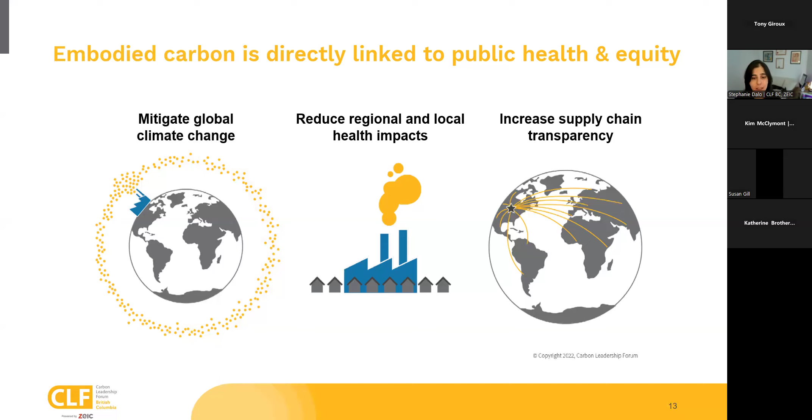Okay, so that's the why. Now I'm going to get into what embodied carbon is, and then we'll get into how we reduce that. There's a little bit on how we measure it, and then we'll get into some strategies.

The term embodied carbon refers to the carbon emissions associated with the entire life cycle of a product. It typically excludes emissions from energy use, known as operational carbon, but it's most frequently applied to construction, where the product is new or renovated buildings. In Vancouver, the embodied carbon of construction is closely associated with what is referred to as Scope 3 emissions, or consumption-based emissions of the construction sector.

My next slide will break down a little bit better the difference between just a life cycle assessment and a whole building life cycle assessment. A whole building LCA is a term that refers to the life cycle assessment of an entire building.

That includes various stages, which captures the product stage, raw material supply, transport to a factory, and manufacturing of the product. Then the transportation of that material to the job site, and the construction emissions related to using those materials.

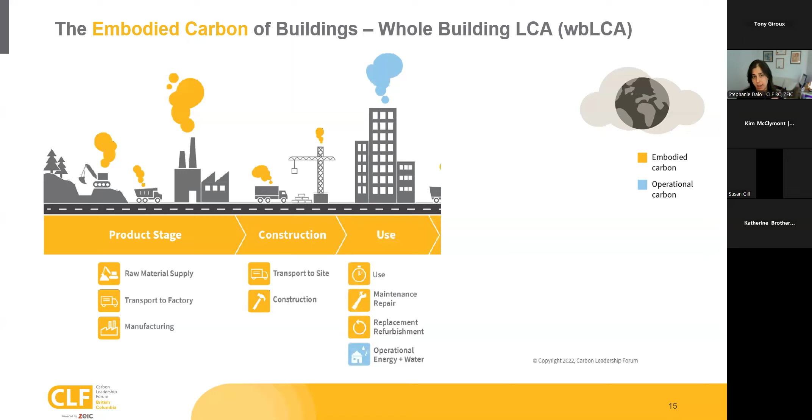And then there's the end of life - the emissions that are a result of the deconstruction or demolition, commonly demolition at this stage, but we'll talk about strategies later and where deconstruction comes into the picture. And then the transportation of that material to the landfill or wherever it's being processed, and any emissions related to waste processing and disposal.

There's also one more stage beyond this. In a whole building LCA, depending on what's driving it - what framework, whether you're following City of Vancouver policy, or frameworks like LEED certification, or the Canadian Green Building Zero Carbon certification - they require you to measure and include these stages, referred to as cradle to grave: the product stage, construction, use, and end of life.

But there's also beyond building life, which if you do track it would be reported separately. That's usually a net positive to your project if you're reusing materials, or designing them so that beyond the building life, they can be captured and reused - that can help reduce your overall whole building life cycle assessment.

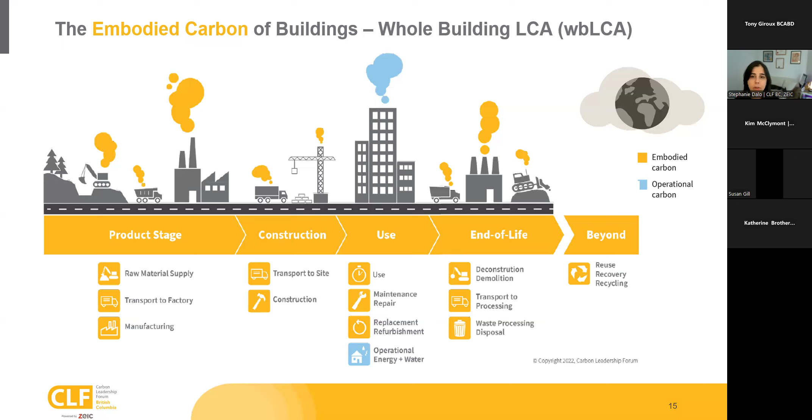Okay, so also typically when we talk about the embodied carbon of a building, we are talking about the substructure and the superstructure, the building envelope. This is referred to as the structure and envelope scope.

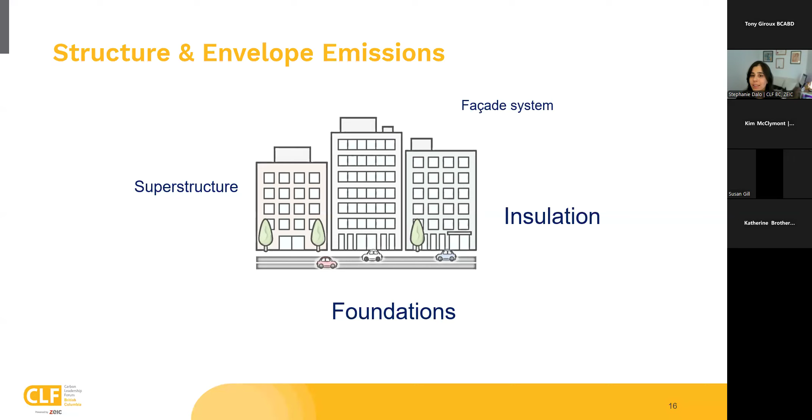So it is most often used for the LCA submissions, but that really limits us in terms of the precision or accuracy of our whole building's embodied carbon emissions over its life cycle, over its lifetime. It's not giving the full picture because it's missing a lot of the full scope emission pieces like interior partitions, mechanical equipment, lighting or landscaping, interior finishes.

As we continue to build capacity and learn and understand these gaps, we are probably missing a big opportunity of other areas to intervene and reduce emissions. As we continue to grow and understand embodied carbon, we want to be understanding these elements as part of the full scope emissions better. We want to start tracking them and finding ways to reduce those emissions as well.

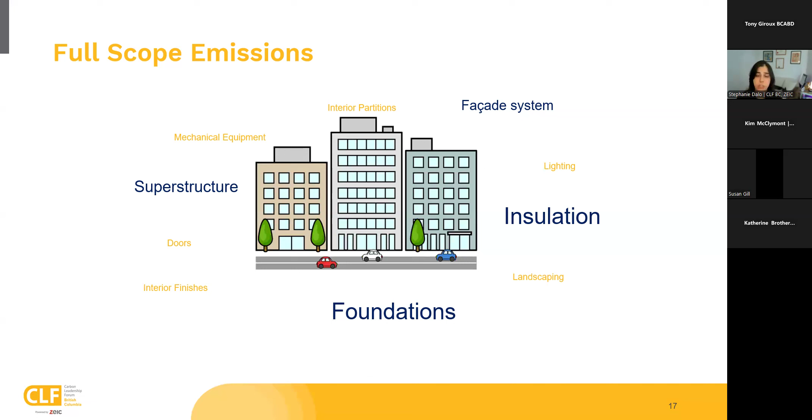This is just a little bit of a fun exercise to get you quantifying embodied carbon a little bit better. So there are a few scenarios here. One of them, in the top left, is a flight from New York to London, or the concrete truck there, that is 1 cubic meter of concrete in the Canadian industry average of a 35 MPa mix.

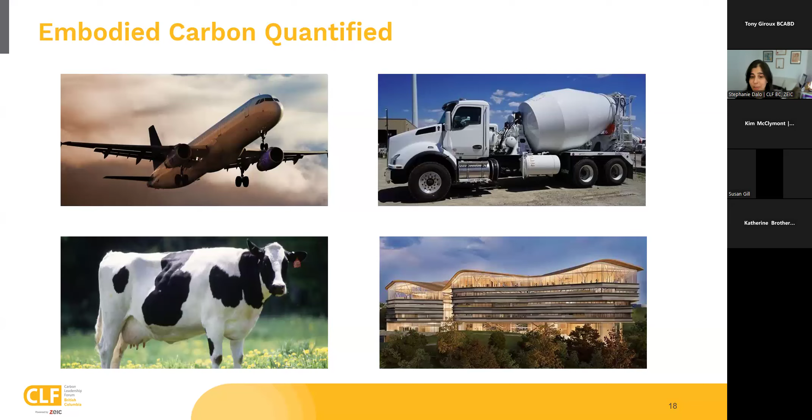Then the other scenario is, what if you were to cut out meat, dairy, or beer for 1 year? What would those emissions be? And in this bottom right corner, that is a library, and just thinking about what would the carbon emissions be for all of the transfer beams in that structure.

And so when you compare them, they're all relative and significant in their own ways, but you can see that the transfer beams just in one library is over 640,000 kilograms of carbon.

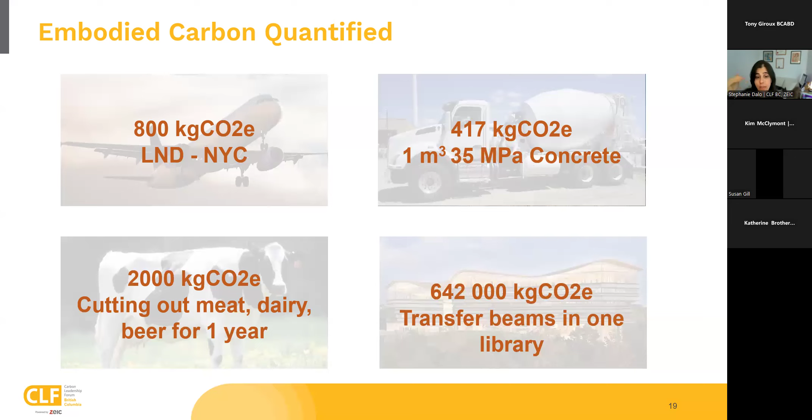The CO2e, that's the carbon dioxide equivalents. So from a personal perspective, you might think, oh, I could be a vegetarian, just cutting that out for a year. But if 320 people decided to cut out meat, dairy, and beer for a year, that's the same as just the emissions for the transfer beams in a library. So it's very high impact if we start to really look at the building industry. We can make a lot of significant reductions, and it could really help us meet our climate goals.

There's a misconception here, and it's not necessarily a misconception, I'd say it's more a behavior or mindset shift. As we learned a lot about operational carbon, it helped us see that embodied carbon is also something meaningful we need to understand better. People are still struggling just to understand operational carbon, and now you're asking them to understand embodied carbon too, and seeing it as 'which one do I prioritize?' There's work to be done in shifting this mindset, because they're not in competition with each other. It's really about understanding both so you know where to intervene in your design to reduce as much as you can, because they're very interrelated. A decision to reduce embodied carbon might impact operational carbon and vice versa. If you think of it as a performance-based way of reducing emissions with a target, thinking of these things together is important, not as one versus the other.

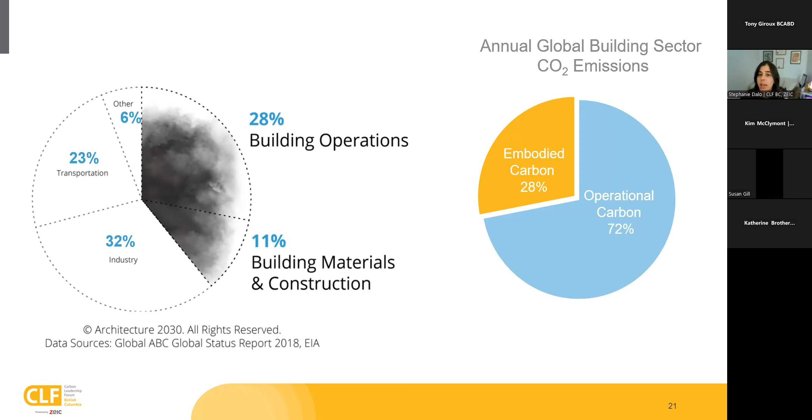When we think about the time value of carbon, something instrumental is that if we have goals of reducing emissions by 2030 or 2050, the emissions from materials and construction are locked in. That's what this graph is showing: it's locked in as soon as your building is operational. So it's important to think about upfront carbon, reducing those emissions, and thinking about how we make sure we're doing what we can now to reduce them. Especially as you see here, in scenario 2 where we're designing higher performance buildings, over the lifetime of that building the impact comes from the embodied carbon.

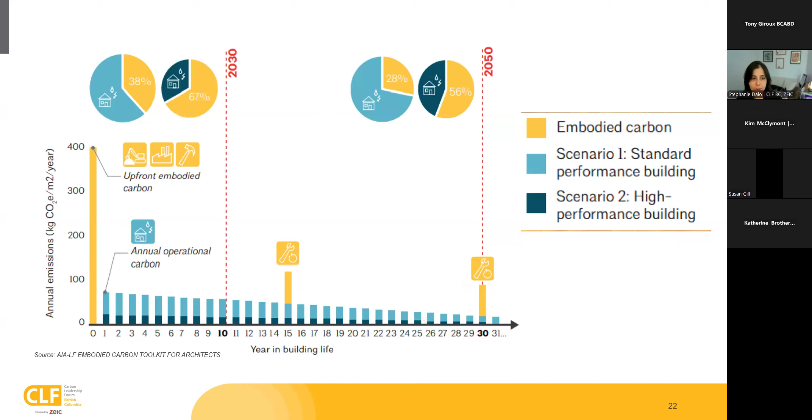This is from another study, a great one from 2023 from RMI Group, again confirming that upfront carbon, the majority of a building's total emissions, is released upfront at the product stage and construction stage. But you can also notice there's a big range, about 35%, in the product stage. So what does that mean? In the way we've been tracking other emissions, A4, A5, B1 to B5, C1 to C4, end of life, there's a lot of opportunity to understand those better, and they likely have more impact than we realize.

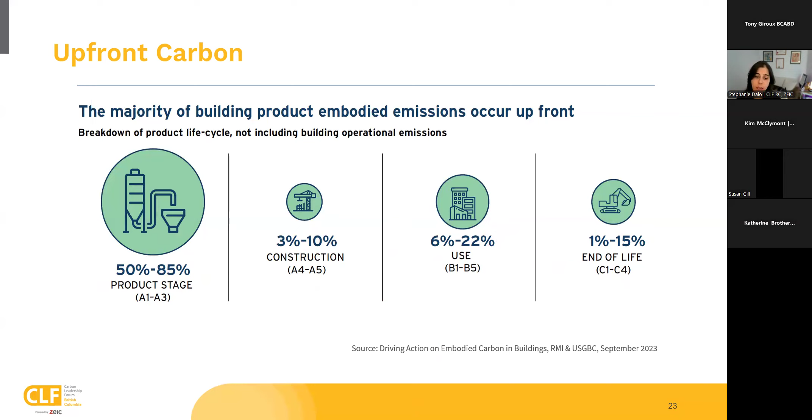So just getting to understand that better is important in helping us achieve those reduction goals. Quickly, also just to point out that the City of Vancouver has goals of reducing emissions by 40% by 2030. This is part of the Climate Emergency Action Plan, big move number 5, which focuses on low carbon materials and construction practices. This is directly addressing embodied carbon, which is really great.

There's this bill I include here, a federal bill on net zero emissions. It's great that these things exist and signal this need or desire to be net zero. But fair criticisms of this type of bill are that it's not legally binding, that it lacks a clear plan, or has no cost estimate. I think it's fair to challenge that, but at the same time, I think it's good that these things exist because they are an incentive for other tools that have come up.

There are other organizations that create frameworks to help guide design teams reduce emissions. There are commitments people make, like the Structural Engineers 2050 commitment, where engineers across organizations commit to reducing the embodied carbon of structural materials in their projects, with the goal of net zero buildings by 2050. There's also the AIA 2030 commitment, a similar commitment but with architects committing to reducing emissions by 2030. These show that the industry is really serious about wanting to do this.

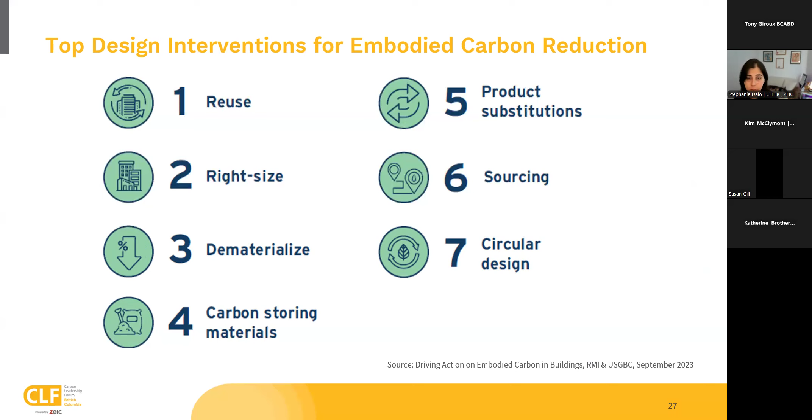And in this nice triangle, I like to show some people—this is one I use often because it captures that idea of build nothing, build less. But really, a lot of what we're talking about here is in the build clever category, using low carbon materials and products and reusing or designing for disassembly.

Yes, all of these strategies are important and can have high impact, but the less new material you use is kind of going back to that upfront carbon piece. If you are preventing the need for new concrete and steel, or even new wood materials—though it depends on if they're sustainably forested—you can really reduce emissions by retaining your existing structure.

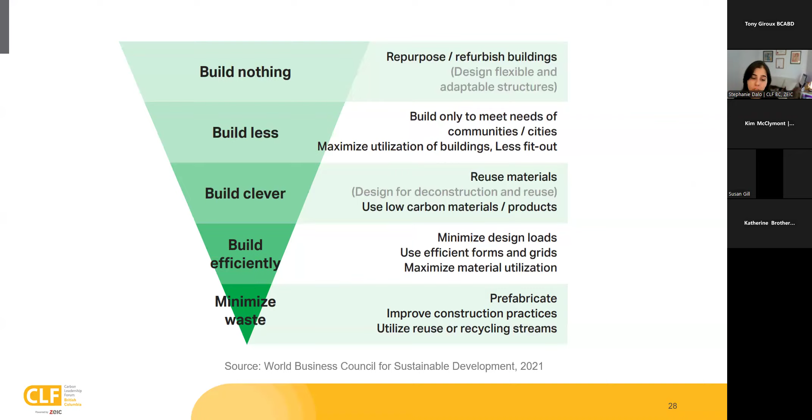So another tool I want to introduce you to: we have developed within CLF BC a low carbon material sourcing guide. Maybe Kim, if you can drop the link into the chat for people so they can go to it. Sorry, I don't have it ready to drop in. But this is a tool for builders and designers to show the lowest carbon products available in BC.

We had Reload Sustainable Design put this together, but they're continuing to manage it with some amazing CLF volunteers, making sure we have materials that include—I didn't explain it enough—but one way to make sure you have the information you need on your materials to know if you're sourcing low carbon materials is to choose materials that have what are called environmental product declarations, or EPDs.

And I apologize, I don't have a slide to show that—it would have probably been a boring slide, honestly. But really, environmental product declarations are required to report on the global warming potential of the materials from that product stage, the A1 to A3, which is raw material extraction, transportation to the manufacturing, and then manufacturing emissions.

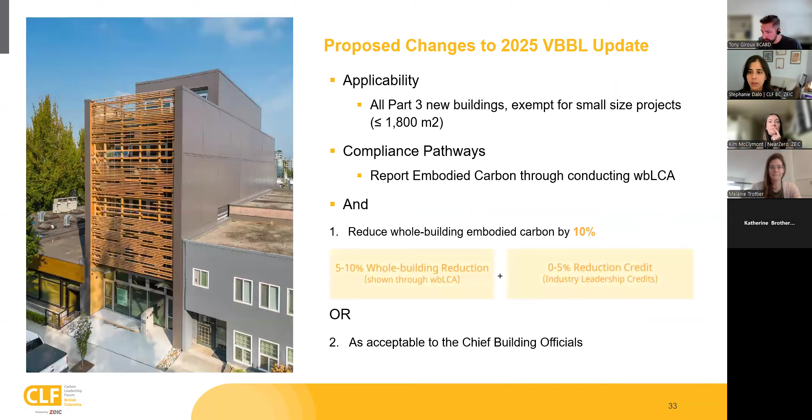But yeah, so I was just going to say, it's steel or concrete, depending on where you're sourcing from and their grid - that upfront carbon would be high depending on how intense, like if the grid is using heavy fossil fuel emissions to produce the steel. So those are kind of the thinking behind reducing.

So you'd want to use insulation - XPS is high emitting, but there are low carbon solutions for cladding and insulation. Maybe I'll pause there because I'm getting sloppy with answering that, because I think it's just not a one size fits all. I think what I'm struggling to answer is that sometimes people will think, oh, low carbon concrete, my strategy of reduction will be low carbon concrete on this project, and they'll make that decision early on. It seems like in theory you're going to get your target.

And then what happens in the construction phase is they might realize the cure times - because this is the case with using supplementary cementitious materials that are lower carbon, it impacts your cure times. So then some people decide, based on our milestone, based on our scheduling, we no longer can use low carbon concrete. So their original goal of reaching a certain reduction ended up being reduced, and it was too late in the project to start applying other strategies. That's why it's good to consider several strategies, and realize there's not always going to be a one size fits all for your project because of other factors that might be influencing that.